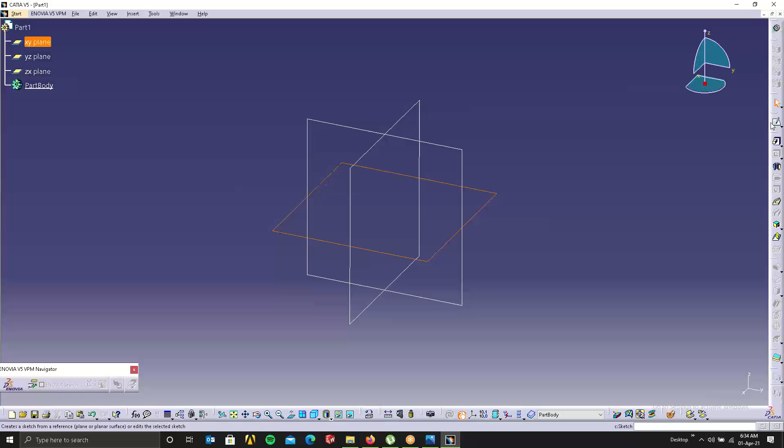There are two different types of assembly: one is top-down assembly and the other one is bottom-up assembly. So what happens in top-down assembly?

So we'll just create some holes.

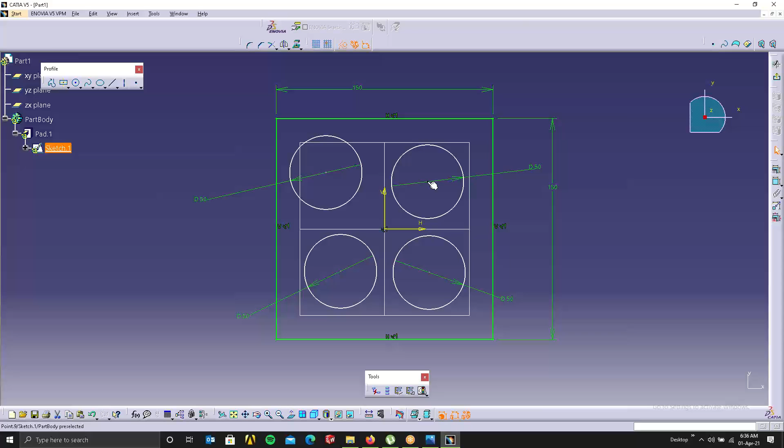So this is 50mm. Just update it. Okay, so I'll just save this file. Save as.

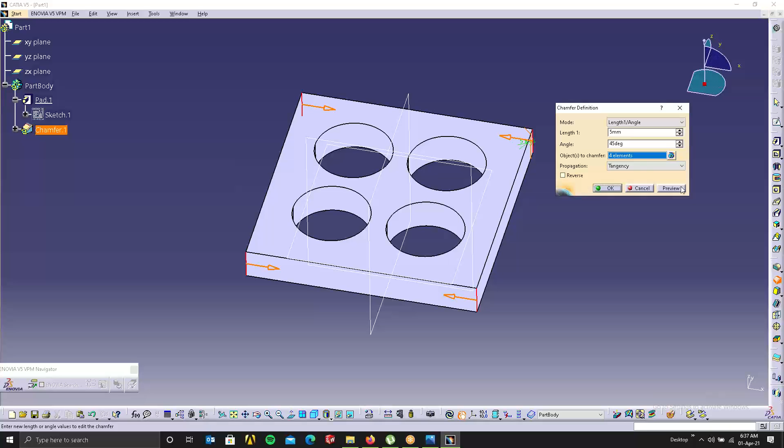Here, most of the time when you're doing this, just give chamfer at the ends, because sharp edges tend to hurt somebody. And don't give chamfer at these edges because machining is very difficult at these edges. Again, this is DFMA - here it's from a safety point of view.

Like when somebody is handling it, if the sharp edges are there, it's going to hurt them, so for that reason we give a chamfer. And one more reason is when it's very sharp, it tends to crack at these edges. For that reason we give chamfer at these locations.

But somebody will come and ask you, 'Oh, give chamfer here also, it'll look nice.' That time you should say no - I won't give that because there'll be a cost escalation. Here the material is removing like this, automatically they'll remove like that - it's much more easy for the machining person also.

But when you're going to give chamfer over here at a 45 degree angle, they have to make one more fixture to place it at that angle. Then after placing it, they have to lock it in place - some scratches will happen there. After that they have to remove this, then again set up the next side - that takes time. Then this side also takes setting time. It'll take some 3 hours for just doing the chamfer, and within that time the whole part could be completed.

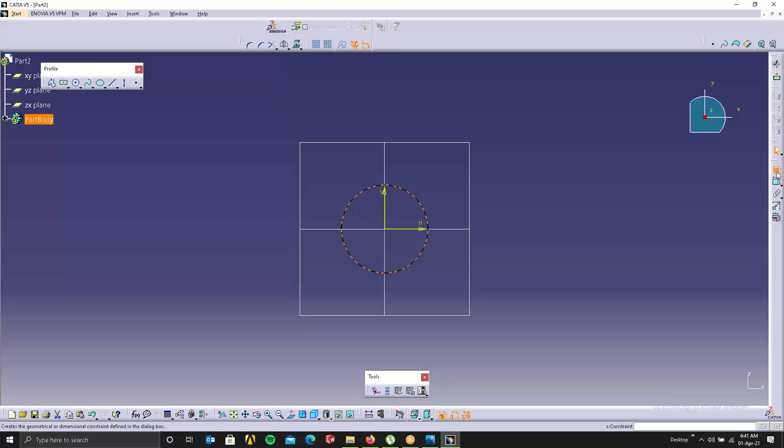It's so hot. So this is 50 dia. So if it's 50 dia, what value should you give here? There it was 50. So how much should we give here?

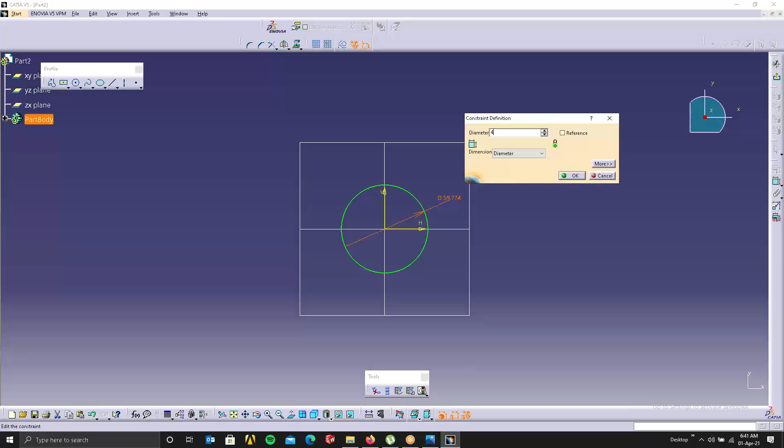For the assembly, you mean? Yeah, 55. 50 would actually fit, right? See, every time you have to give some tolerance. 49.5 or 49.9, like this you have to give. At least 1 clearance you should give. 49.8, something like this you should give.

How much is the acceptable one? Usually I give 0.1. Or else I'll give 1 mm, not 0.1, 1 mm you should give. But since there's a standard chart, from 0 to 30 it is 0.1. 100 to 200, it is 1 mm. 300 to 400 tolerance is 4 mm, 3 mm, like that. We have a clearance chart, standard clearance chart. So in that we have to do it. This is a very minute clearance.

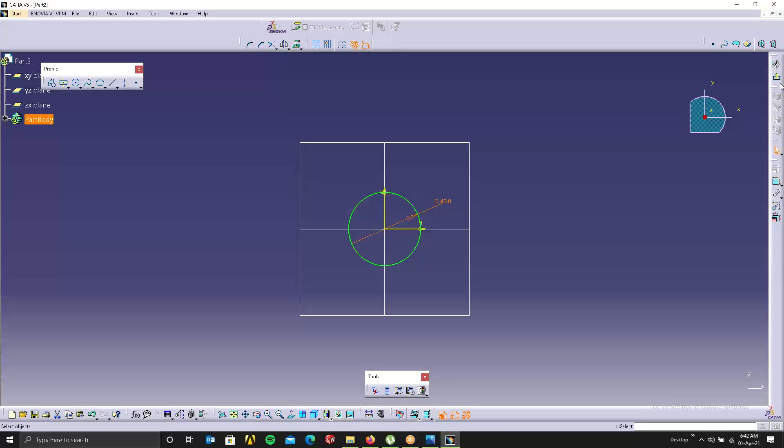So this will cost more also. So like that you have to do. But we have to make it fit inside. So we have to just pad it. Yes, okay.

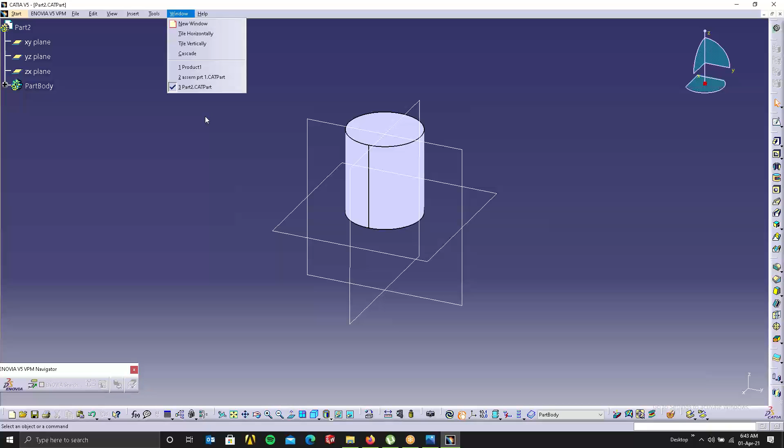Okay, so we will save. Save here only. Now straight away going to the assembly workbench. Where is that? Go to Windows. In Windows, all those things will be open. So go to Product. Now we are going to do our bottom-up assembly.

In this, what we are going to do is first see how to start, how to put something inside. No idea, right? So for that reason here we have component, we have component parts. In this, we can put existing component with positioning, or existing component. These are two options you have to use for bottom-up assembly.

Existing component with positioning is when you're bringing some part from outside, so that part will have positioning. Here you can orient it and everything. Here is just directly putting it. After selecting this, nothing happens, so you have to select this product. After selecting this, see this is in red. Select the product, you'll get the dialog box. In this dialog box, go down, select this, click OK, open.

One sec. So you'll get the part exactly in the center. Okay, just like the main body or something. If you're putting, you can just put it like this. I'll just remove this.

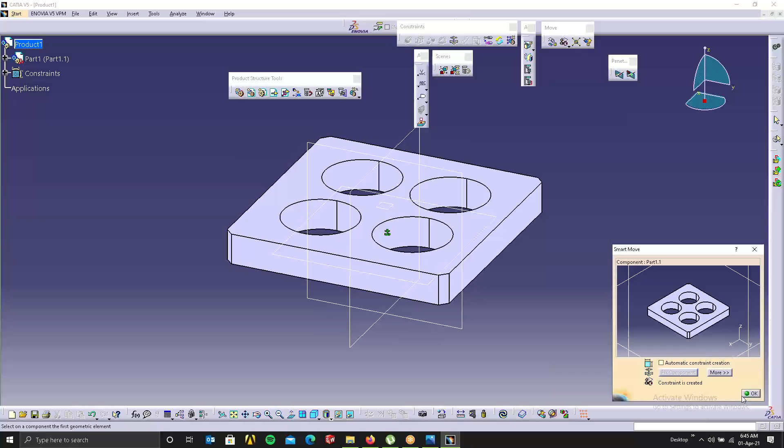Whatever is the main body, what you have to do is fix the component first. Fix means it should not move from the position. Once that is fixed, you can click OK. See, then directly you can apply the constraints. So now I'll delete this.

What you have to do is, see, you can use multiple products here. You can select this and select this, and put both. See, both these things you can put. So fix this one first, the component, and this. Once this is done, click OK. There you go, this also comes. Leave it, both is fixed, huh?

What was it? Take this, take this, select both, click OK. So both you can put it like this. Right click. Something is wrong.

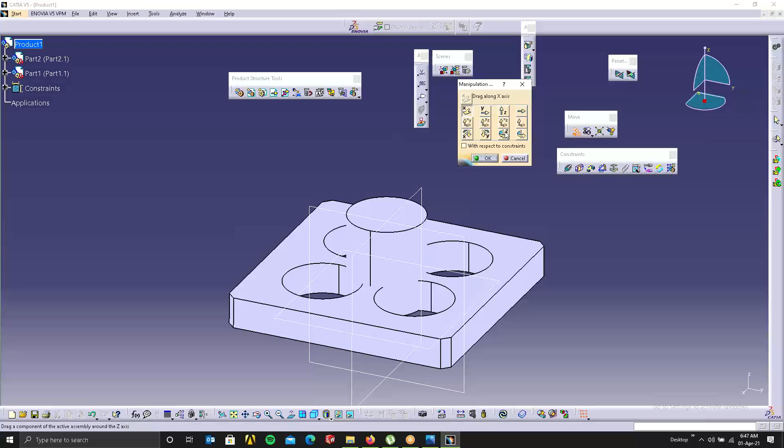So here basically we have many commands. First one is to move. Once putting it in the screen is done, next we have the move commands, then we have the constraints - these are the different constraints, and these are the move commands. The first one is manipulation. In manipulation we get this option to move the components in whichever direction you want.

First one is X direction. See the compass, this is x direction. In x direction, we can move it. Then we have y direction - again see the compass, this is y direction, so we can move it. See the compass, this is z direction, we can move it in z direction.

Here we have this arrow. This is our independent direction. So if you have any inclined line or something, you can just move this thing in that direction. Any edge you select and it will move in that direction.

Then is the planes, datum plane. See x, y - x and y is this. So in this area it'll move in this direction, x and y direction, or x y plane.

Then yz plane, y and z. Yz means this yz plane - this plane, it's going to move completely.

Then is what? X z, x and z - again in this plane, this plane is there, right? Wherever you place it, it'll be exactly on this plane. By seeing visually it will look somewhere else, but it's exactly on this plane.

Okay, then we can select any plane if you want - any other datum plane if you have created, with respect to that you can move.

Next is rotating, rotating with respect to x-axis. So this is x-axis, you can rotate it with respect to x-axis.

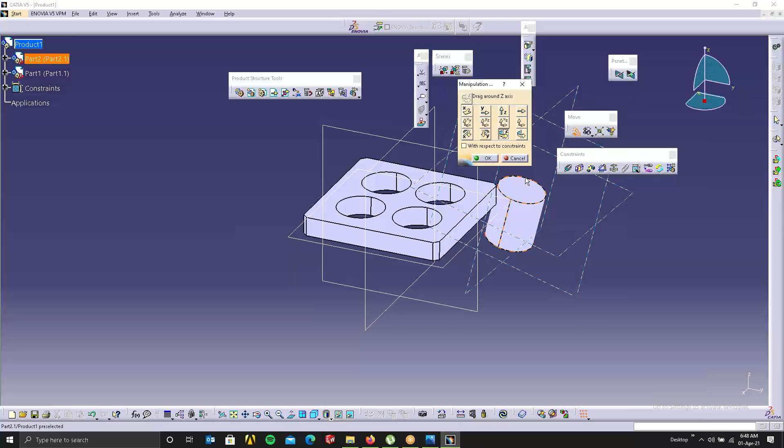And next is independent. Independent means with respect to whatever line or angle you want, we can rotate. So if you want this, I can rotate it with respect to this line. Okay, understood? So that's the advantage.

So first we'll just move this thing here, whichever direction you want, just move this thing outside. See, this is not fixed, so it's moving.

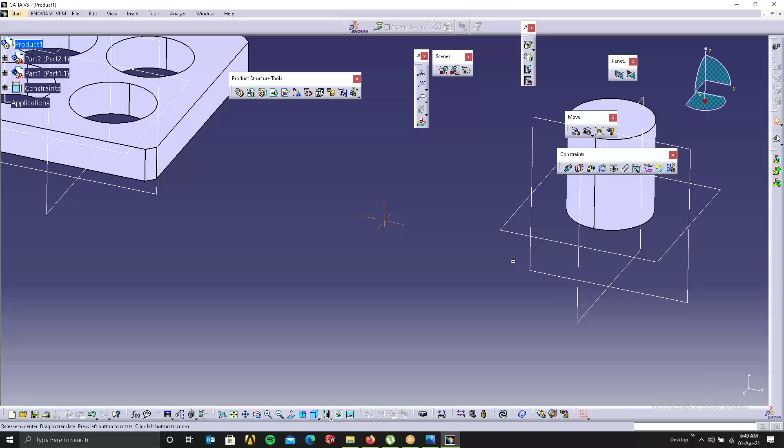Okay, good. So now once that is done, first we will do is - see here only we have the fixed constraint, so fix this thing in this position so that it doesn't move.

Next to that we have something called snap. So snap basically is like constraints, but it's not constraints. Like in constraints, we can move it, you can position it, we can do all those things, but the constraint is not applied.

You can see, we can just rotate it. See, we can rotate the product. We can just take this and take the center, put it here. See, it's like constraints - we can rotate it if you want, we can do anything with that. Using this, it's again positioning, moving the part from here to there like this. See, you can rotate it if you want, like this you can assemble it.

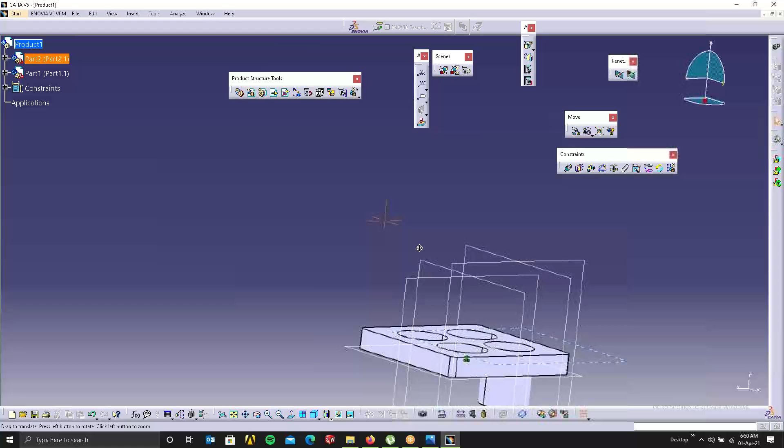Okay, but always remember, this is just a positioning movement - see, move command, it's just a move command, nothing else. Once this is done, I'll just hold control and drag this thing.

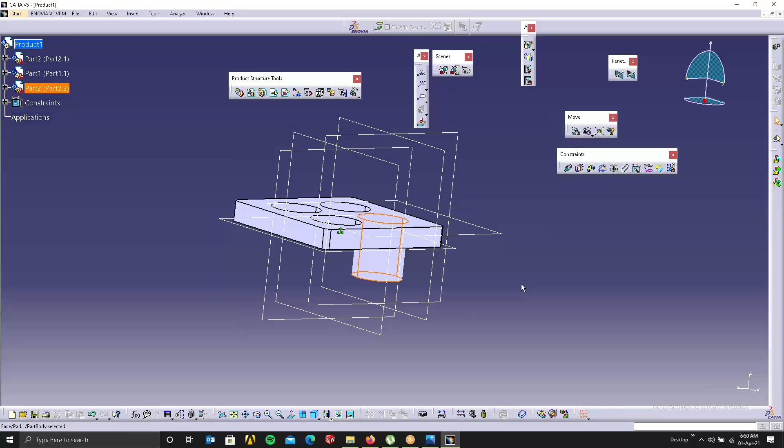Okay, so I'm coming, so leave it. So what I'll do is I'll just right click, copy, I'll put it here, I'll paste it here. See, part 2 is copied. I'll just move this in x direction.

Okay, I'll copy this also. Yeah, so you saw this, I applied snap over here for this part. So I think so, yeah, correct. So now click OK.

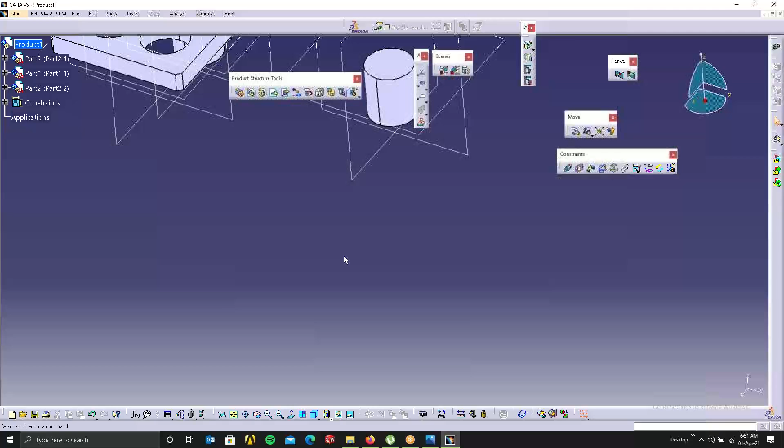Now we are going to apply these constraints for this. So here we can see coincident constraint. In assembly workbench, 90% of the assembly constraints you can use this constraint itself - this constraint only you can use.

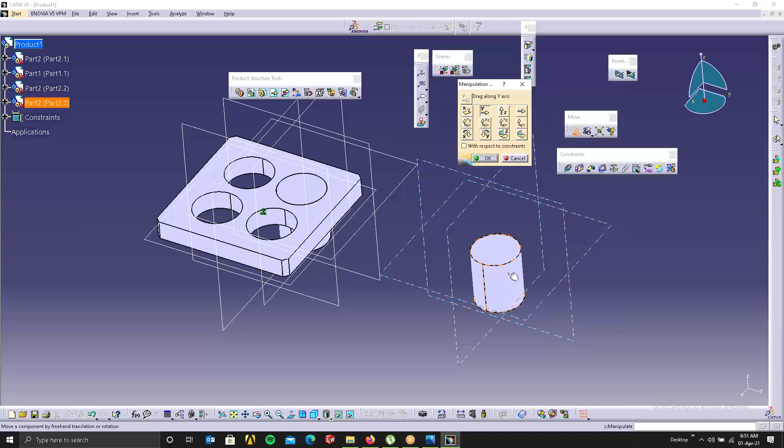Right click, copy and paste here, okay maybe one more time. So most of the 90% of things you can use this constraint only.

So you can just select this, close, select the center axis, select the center axis for the circle. Okay, done. Select this and select this. See again, wait, I'll just position this one. Which axis? Z axis.

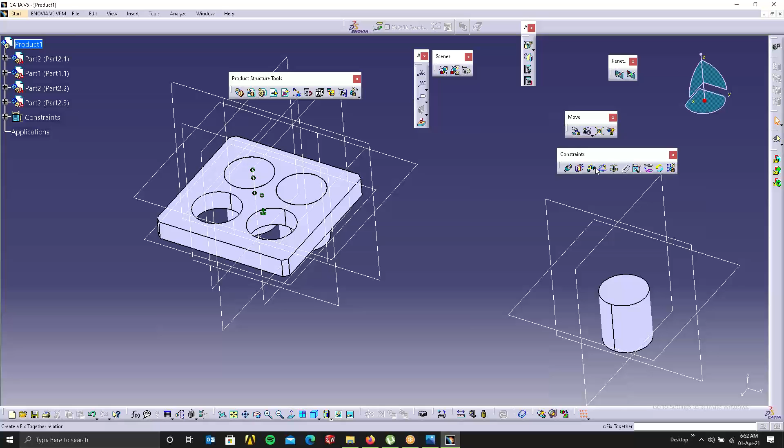See, I'll just move it here. Using constraints, I made the center axis coincident. Again, using coincident, I'm going to make these faces coincident. See, like this. Most of the things, you can use the same tool for most of the applications. So you can see these two are constrained.

Now what I'm going to do is use a move command. I'm going to pull this thing out, and pull this thing also out. These two things I pulled out - one I used snap, one I used constraint. So the one in which I used constraint, these circles are seen. In this snap, nothing is seen.

Now what I'll do is update. When I update it, the one which is constrained goes and sits in its place, and the one which used snap is just lying down there. That is why we should always remember to use the constraints, not just the snap tool. Snap tool you can use for your advantage, but always remember to use the constraints first.

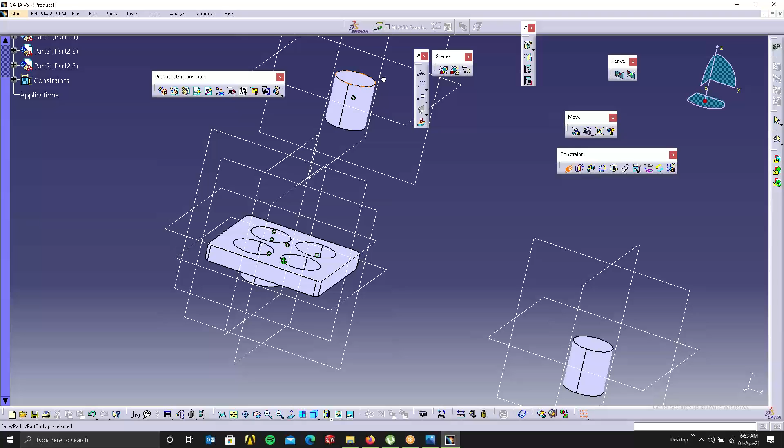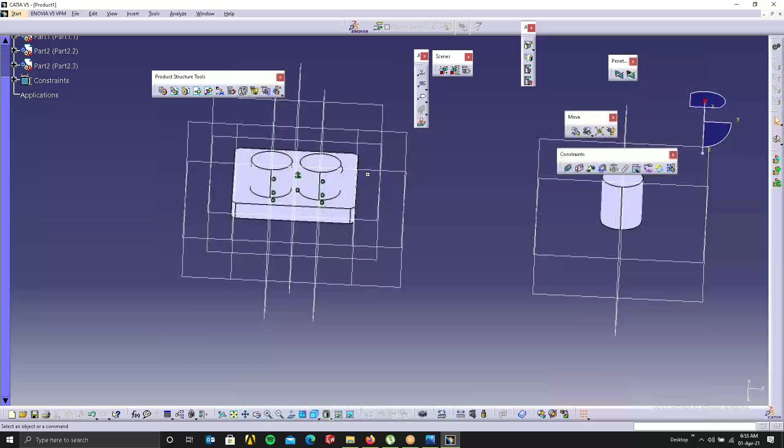Click OK like this. Now even if you drag both out, it'll come back to its position automatically. See, now if I click OK, update, both will sit back in its place. So the assembly is done. Understood? This is how you do the assembly.

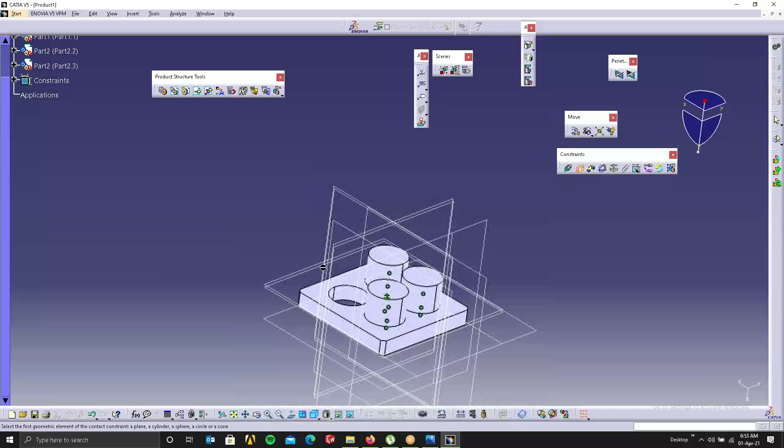Then here we have contact constraints. The contact constraint, again, it's the same thing. See what we did with coincident? Same thing only, that is what happens. Face to face constraint it is. See this face, see this face to this face. That is your contact constraint.

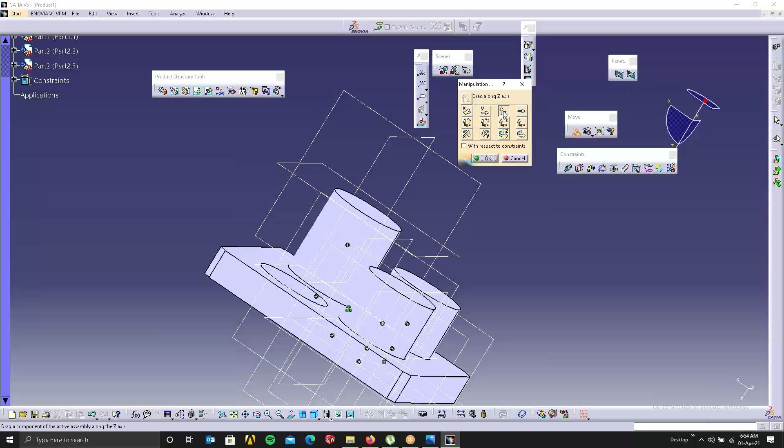But that is again double work because the face which it's going to select might be reversed. See now what's happened is it selected the wrong face. It's an unnecessary waste of time. So that's why I prefer this constraint most of the time. By Z axis, like this. Select this face, select this. So it's going reversed now. It's unnecessary waste of time.

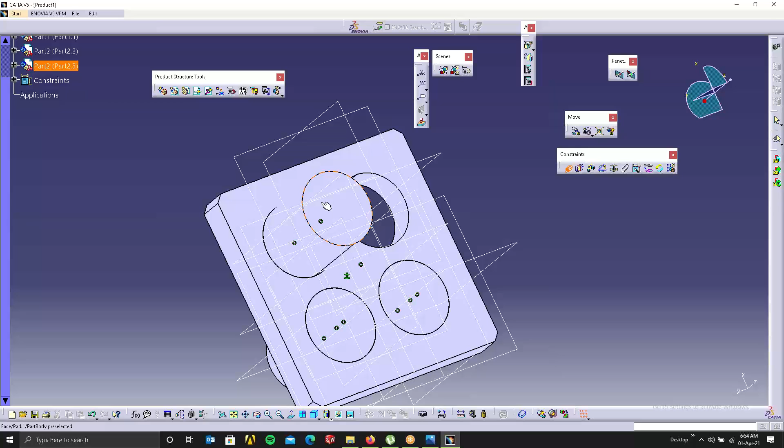Better than that is using this coincident only - automatically it's affected. Then there's this distance, offset distance. For that I'll delete this constraint. I'll delete this on the center. That's okay. Now I'll just move this thing a little up.

Click OK. Now sometimes we'll have to position the part at a certain distance. Then we have this offset. So we can select this face and this face and specify how much distance you want - maybe 20 or 30 mm. You just give the distance here. This is negative, directions will be negative. Click OK. So that position, you can give 20 mm distance or any distance using this offset constraint.

Then angular - if you want to give any angle, similar to this, we can select any part, any face, and give the angle between those two. It was fully defined, so here we can specify the angle. Two parts you select, two planes, this face and this face. Here it's a constraint we can use, but two faces you select in which you can apply the angle between them, and here you specify the angle. And you'll get it.

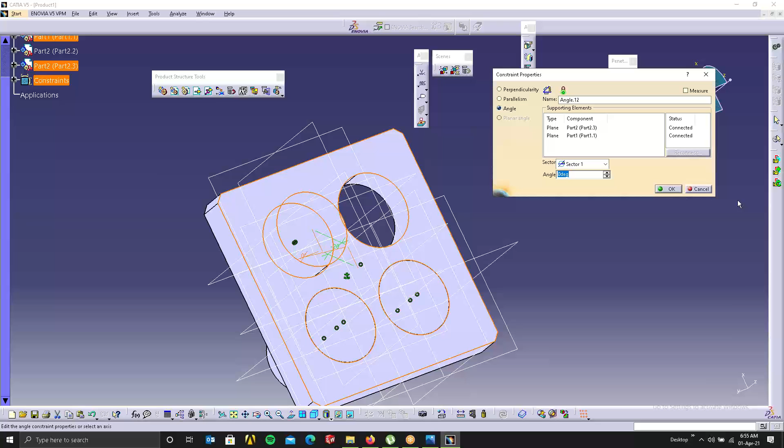Then this is a fixed constraint which we used. And here we have the pattern - reuse pattern. So now basically you saw we used normal circles, right? So that's why we're getting this.

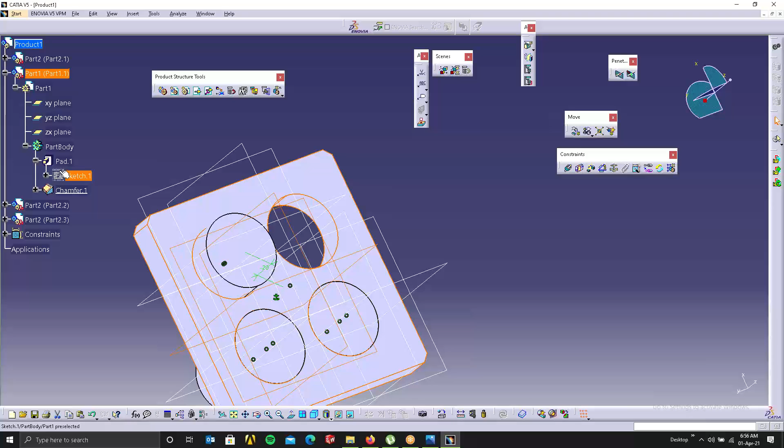Now one more thing I'll show you, an important thing. See, these are the parts that we did, right? Part one is the base. So if I click on plus, if I go to specification tree, I can see the part body - I can see the pad, I can see the chamfer. So what I can do is just double click on this. If I double click, I'm going to the part design body workbench. See, part design - I just double clicked.

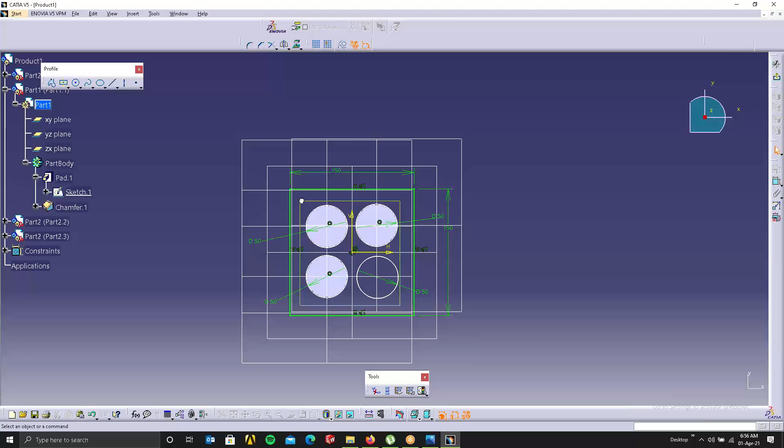So now what I'll do is I'll go here, double click on the sketch. I can do the editing part also. Understood? So I'll delete this. This is called bottom up approach. So all the sketches you can do it by yourself in this position. Now once that is done...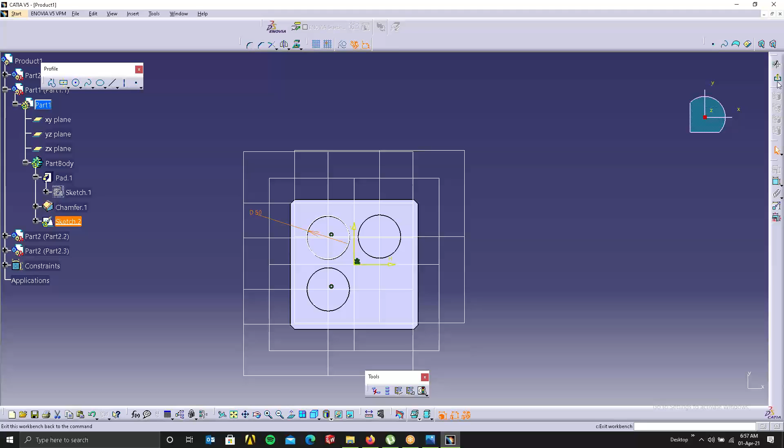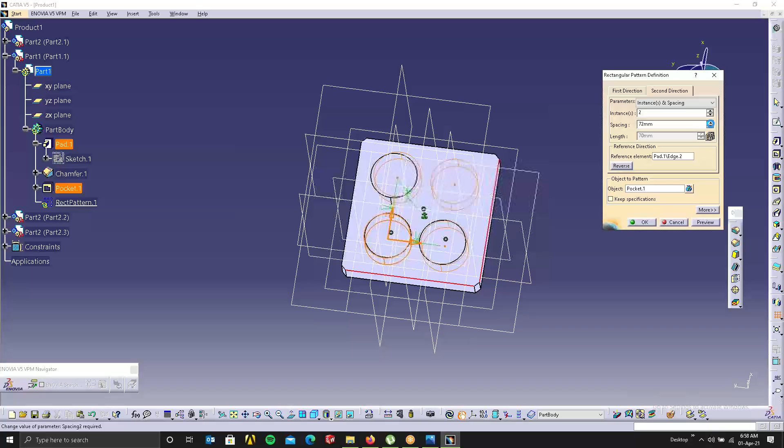So this thing, what distance here you put? Okay, now second direction also you take this direction. Add one more. Okay, click OK. So this is done.

Now to exit this pad thing, go double click on product. If you double click here, you'll get this. So you can see these constraints all here and there.

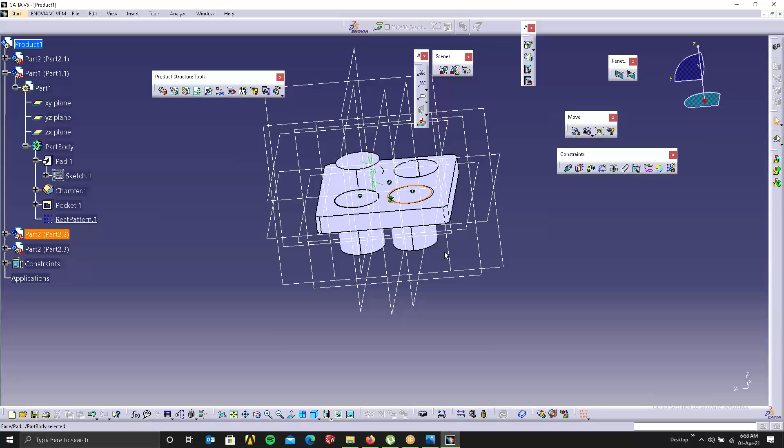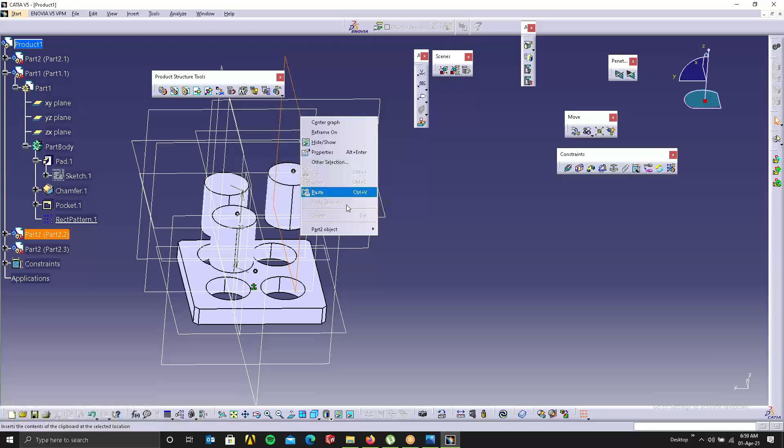So what I'll do is I have to constrain this again. So just move this up, up, up. And one more thing before putting this thing in assembly, just before saving the file, just hide these things. Hide the datum planes.

Because it's so confusing here, just hide it before saving it. So we don't need those things. So here you can see 20 mm. Just delete everything because these will be over constrained. Okay, that is surface, that's okay.

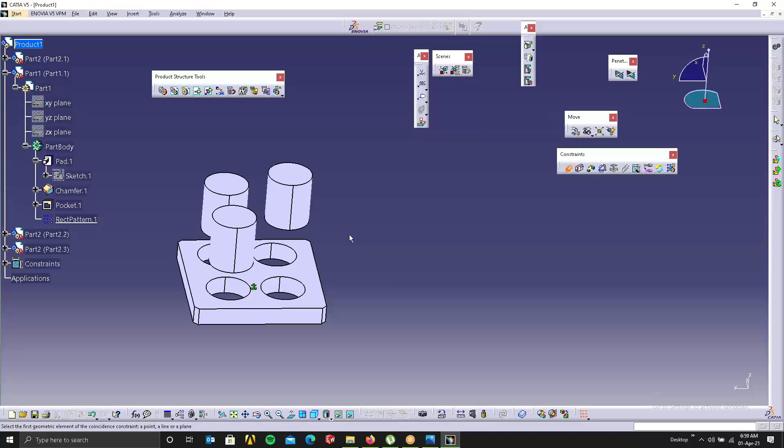So now we'll just take constraints. Sorry, center axis, center of this. Center axis, center of this. Center axis, center of this.

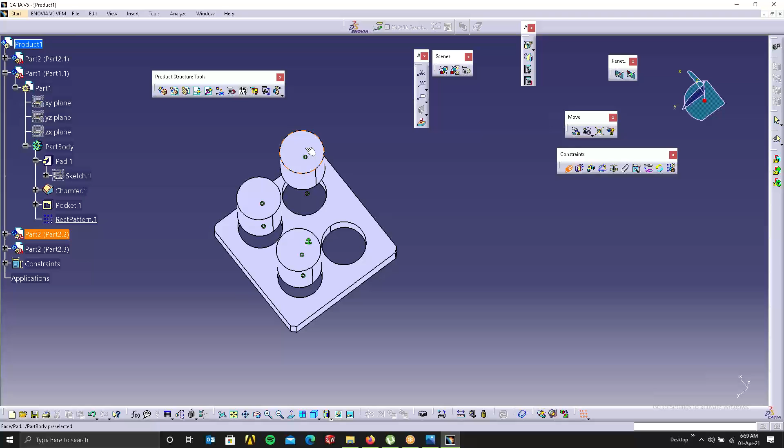Then select this to this. Okay, this to this. Okay, this to this. Okay.

So now I'll just... what we are going to do something. This thing I'll just hide. Control Z. This thing. So wait, we don't need to do so many things. So I'll basically delete these two things. So much time we used here, right?

So what I can do is straight away use this command. So pattern, which is our pattern. So you have to open this. So this will be closed like this. You have to open, you have to select this rectangular pattern. So all the pattern, everything is shown.

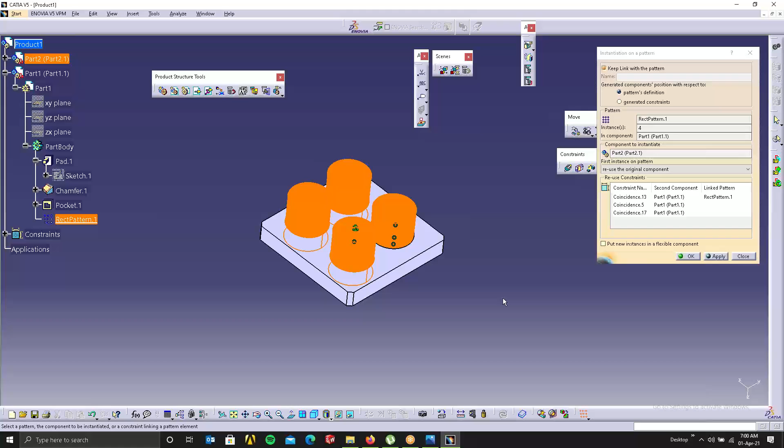So component to instantiate, our this component will instantiate. Just within how many seconds? 0.1 seconds, I could do this. See, all those things is done. So like this, I could save my time. All the constraints is also reapplied.

So that's why we always make sure to use constraints like patterns in your model. As I told you before, this fillets, all those things don't use in sketch. Make sure you use it there.

So this is how your assemblies — this is only so much is there in your assembly workbench. Then here we have this trim command, this whole all those things. This you can directly, as I told you, open this, go to your part design, and you can do it. No problem, understood?

What else is there in this? So now we'll do one assembly for one parts.

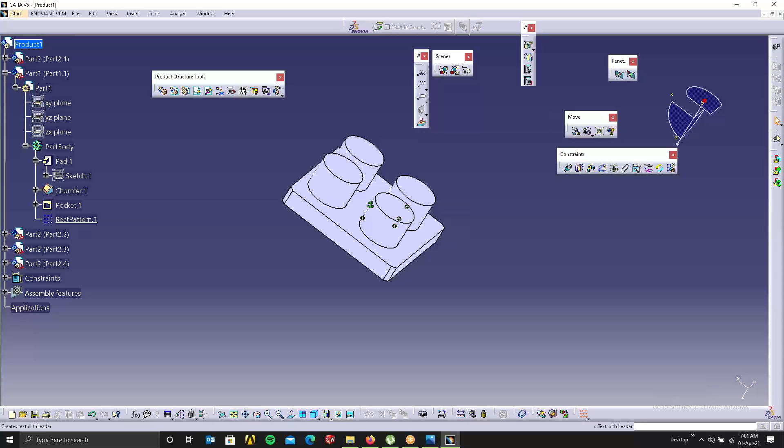So I'll just show you this. You take this as an assignment. Where is this assembly? Take screenshots and try to complete it.

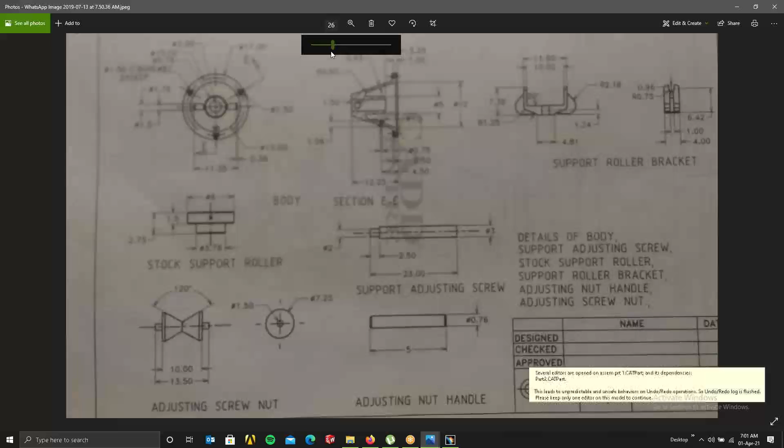Can you zoom in? It's okay, don't worry about this. I'll give you more photos.

Done. Yeah, done. Okay, done. Prabha? Uh-huh.

Next, this. I can't really see what's there. Don't worry, I'll just give you more focus. You just take this.

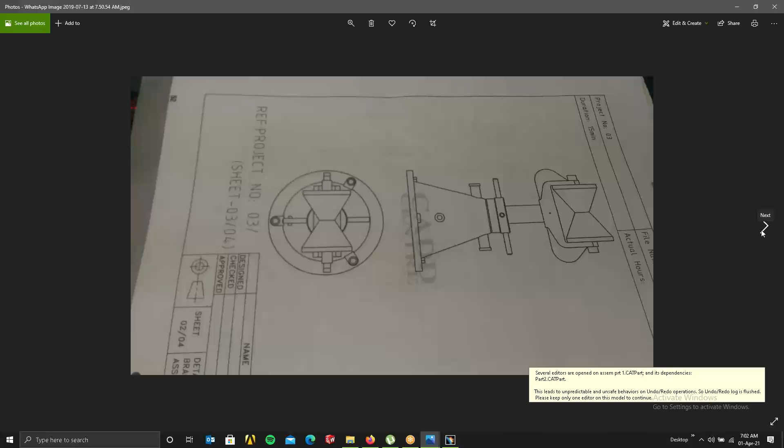Have patience, you have very less patience. You're always in a hurry. So this you take. Yep.

Srivadan, done? Yeah, done. Okay, this you take.

So this is called BOM, Bill of Material. So how many parts is there in your model? So all those things is documented here. The manufacturing team, they can see okay, how many numbers are there, four numbers are there, so accordingly they'll manufacture it, accordingly they'll assemble it. So all those things is very important. Bill of materials, one of the most important things in mechanical design engineering.

So not just this quantity, they'll give the material type. If you're procuring the material, they'll give you the make. Like if you're taking QDCs, there'll be different companies — you'll have Hamlet, you'll have Stäubli, you'll have this Parker, multiple companies. So those companies' make will be shown here, what material they are using will be shown. So all those things will be there, and the part number. If you're procuring it, the part number of the product will also be shown here.

Understood? So that is called bill of material. And item number you can see, not that item number, this is this item number here. See, 1, 2, 3, 4, 5, 6, 7. So it's like showing which part is where.

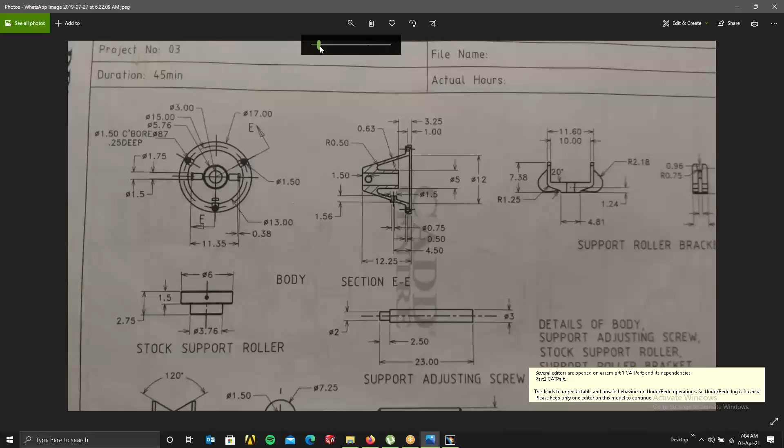Done. Done. Yeah, done. This also you take, this one. I'm done. Yep, take this. Done. Yeah, very much so.

So seeing all these things, study it properly, then you do it. Because I'll show you why.

See here in this part, they have given the outer diameter 6, and all the thickness, everything they have given. This is stock support roller, right? They haven't given it. See, if you take the stock support roller, what is this? If you take the stock support roller, number 4.

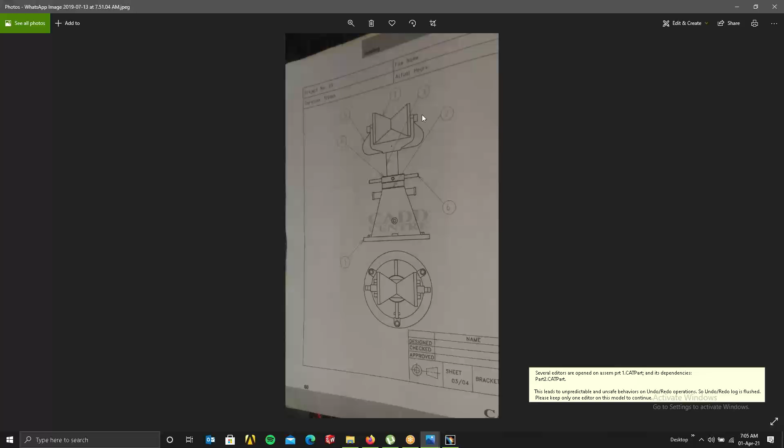See number 4, this here is stock support roller, but this rod is passing through it, right? This rod is going inside this. So if you see this number 3, this rod is number 3. So number 3 is support adjusting screw. So the support adjusting screw is going through the stock support roller.

But in this, if you see stock support roller, there is no inside diameter they have given, right? So support adjusting screw is here. So this thing is going inside this. So what you have to do is diameter 3 you have to make inside. Okay, then only this thing will go inside.

So this is how people, like the manufacturing team, if some dimensions are missed out, they do this. They check it like this, so this thing will go inside. Once they have the clarity that this is going inside this, they'll automatically take this diameter. Okay, like this they have to do. Understood? So study this and accordingly do that.

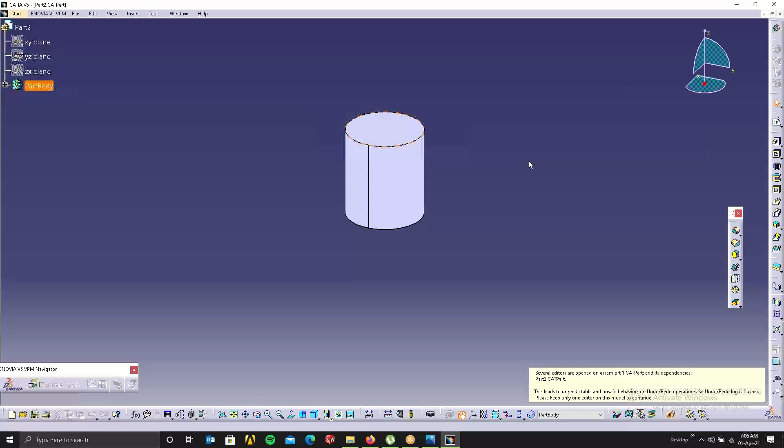Understood? Now we'll do this assembly part. So we'll just close this, not required. We'll close this also, not required. So we'll just open assembly.

Mechanical design, assembly design. So we'll just click existing parts, select this. We'll go to assembly, all the parts we'll select, we'll put it here. Okay, this is done, already done.

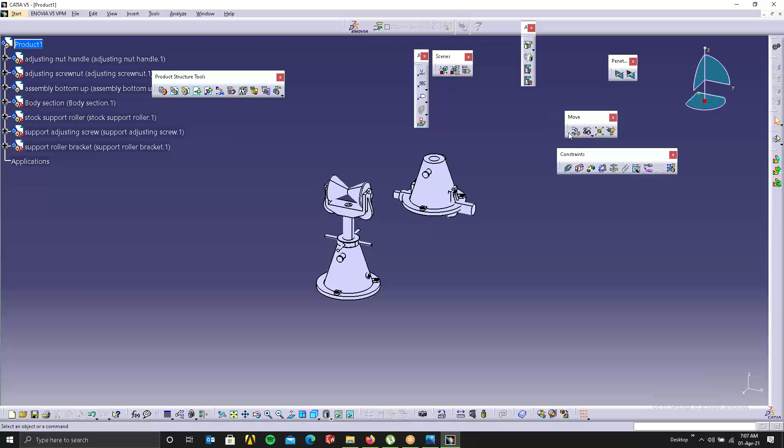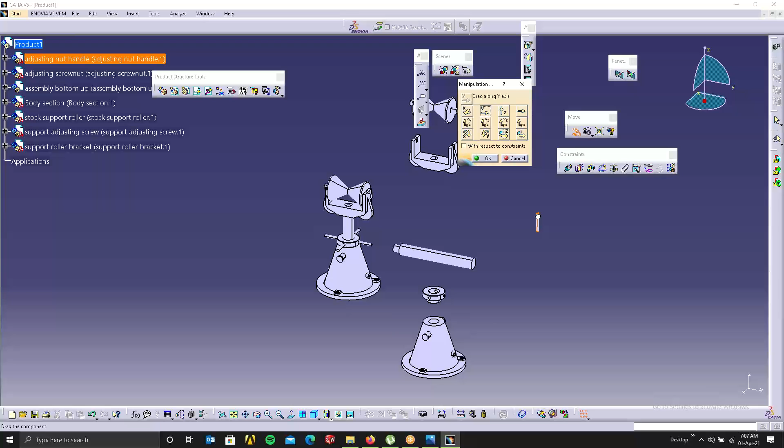So we'll just take our move command. We'll just put it here and there. So this thing is here, this thing will go up, this thing somewhere here, this thing will come below that. So now this y-axis, this will put here. Okay, so these are the parts. Now I'll just click OK.

So now our coincident, with coincident only I can do everything. I'll select this center axis of this, that is done. Then this part, same thing I'll do. This thing, center axis of this to center axis of that is also done. Then center axis of this to center axis of this circle inside. Wherever circle is there, you'll get an axis. So it's much more convenient for us to constrain it. So center axis is also exactly in the center.

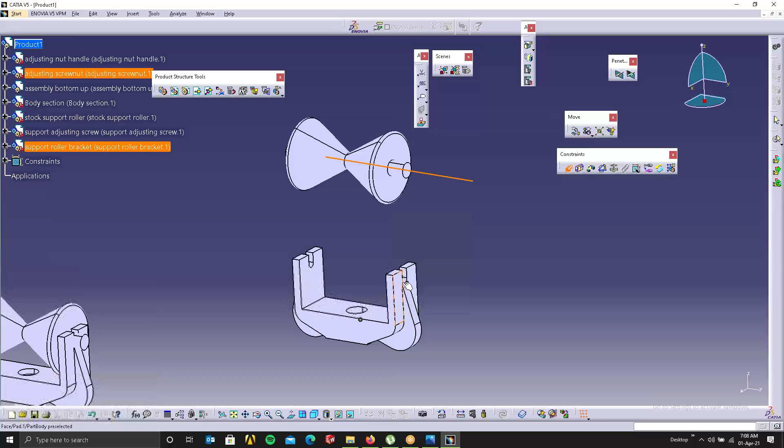Okay, that's done. Now we can take coincident again. See, this circle is there, center axis you take. Here also one circle is there. Wherever circle is there, you can give the center axis. Okay, that is done. Now select the surface.

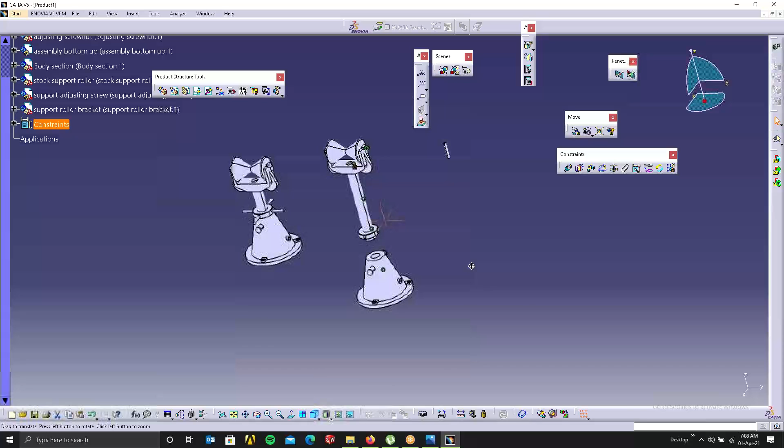Again, I can use this coincident constraint. I can select the surface, I can select this surface. Okay, done. Click OK. Now I can select this surface, I can select this surface to that of this surface. So that's constraint. Click OK.

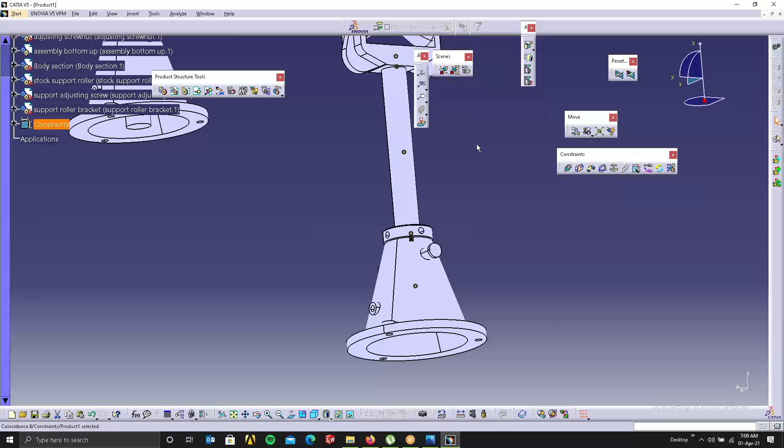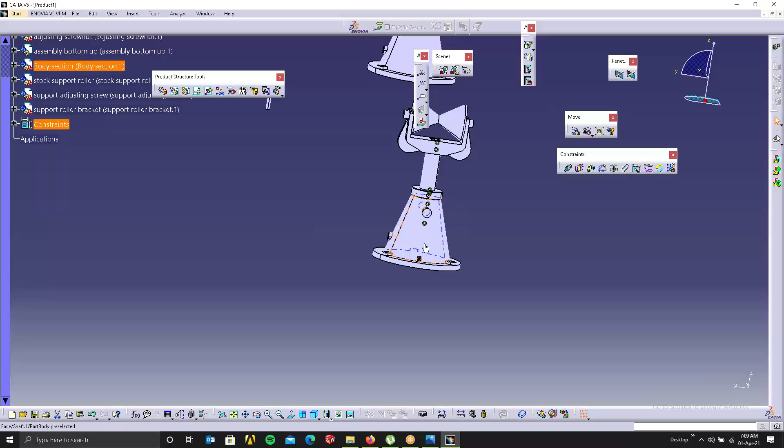Now I'll just push this thing inside some distance. So I'll just select, wait, I'll just better this. I'll give coincident to this. Where is this surface to this surface, I'll give. I click OK. So you can see this came inside. So what I did is I gave coincident to this surface again, that rod.

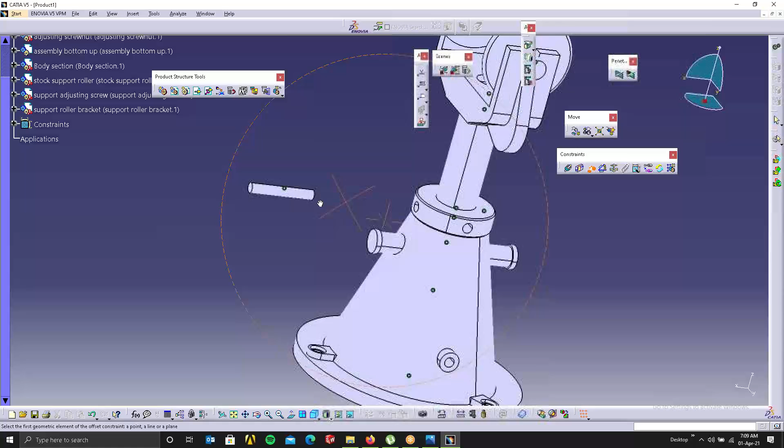So that is done. Now we have this small thing. So this also I can give coincident constraint. This one I can select center of this, I'll select. So it's come till here. Now what coincident can I apply because this is circular in shape? So what I can do is I can give distance from this flat surface to the center axis you give. Here I'll give 2 mm. Yeah, okay, so this is done.

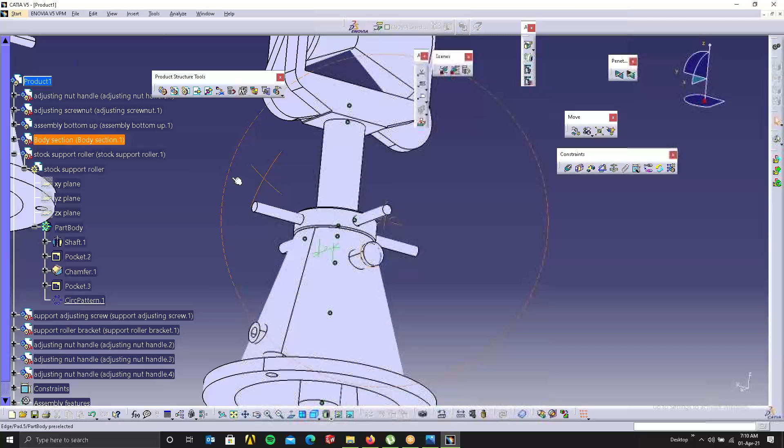Now similar to what we discussed earlier, this part will just go open, open, open part. Doesn't see circular pattern is there? So no need to break your head, just within few seconds you can complete it. You can just select the circular pattern, so all the circular patterns are selected. Then which component you want to pattern, that you click. That's it, rest the computer will do. So click OK. So work is done, see your assembly is done. Within how much time? Within few seconds your assembly is done.

Understood? Yeah. Srivardan, any doubts in this?

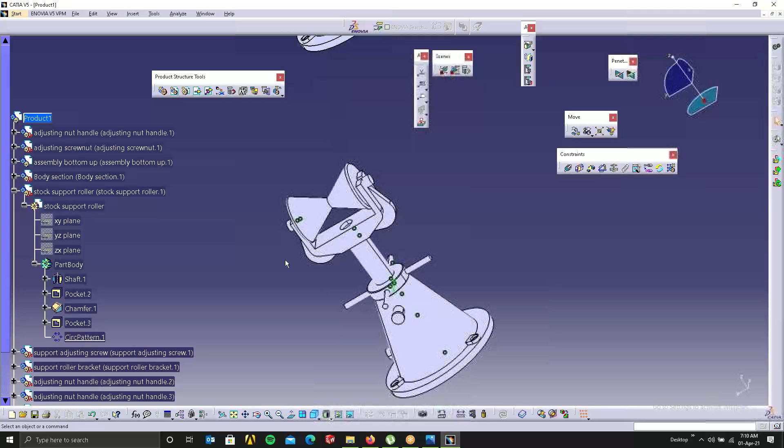Should we also constrain the roller top of thing on the top? I mean, it's already constrained. See, it's already constrained to the axis, but not to the side. I think inside, what is it? It should still be, it should.

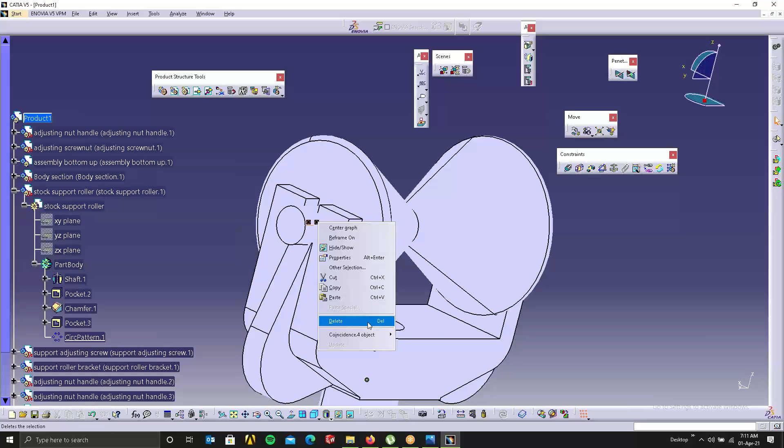We can. Yeah, we only constrain it to the axis, so it can still move on the axis, right? Wait, let's check, like this, let's see. Move in the axis, yeah, that is there. If you do this, just check it like this.

Use the update command. Update. Something wrong with this. Again, I think there's some system error.

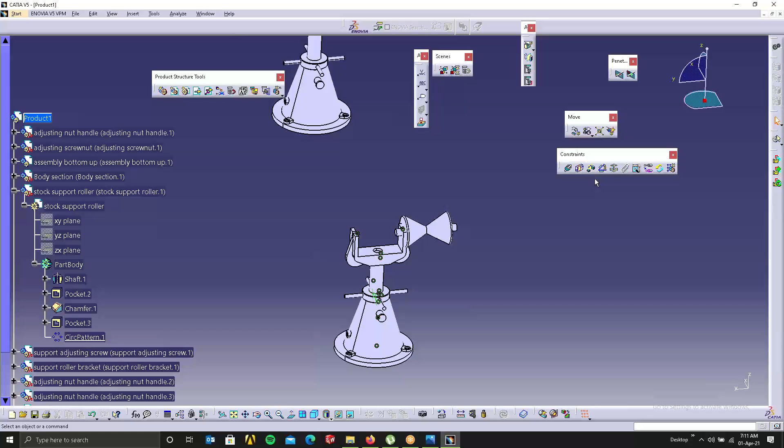That's okay, you can just give the dimension to fix it. So you can give this surface to this surface. You can give 2 mm, or right, point 2 something. Click OK. But that's also too much for it.

Point 0.1, because the dimension for this is very small. Point 0.1 also, I think it's very big. I think it should be a contact constraint. It's not contact, it should have some free movement.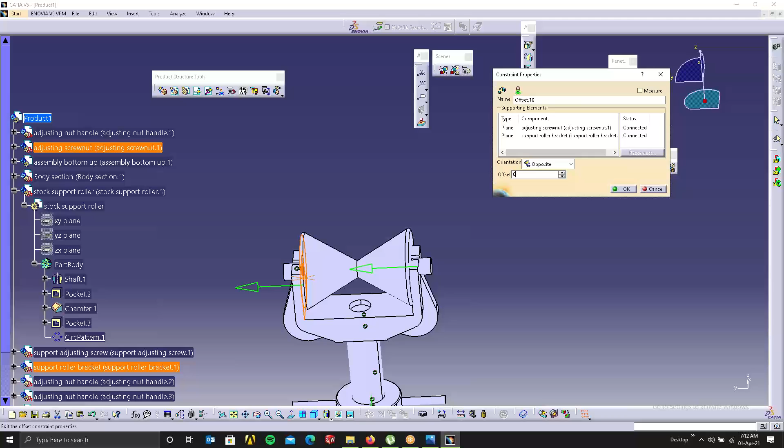Zero. Yeah, yeah, we can give contact constraint. Again, coincident we can give it. Okay, now it's fixed. You can give dimension, or we can just give coincident surface to surface.

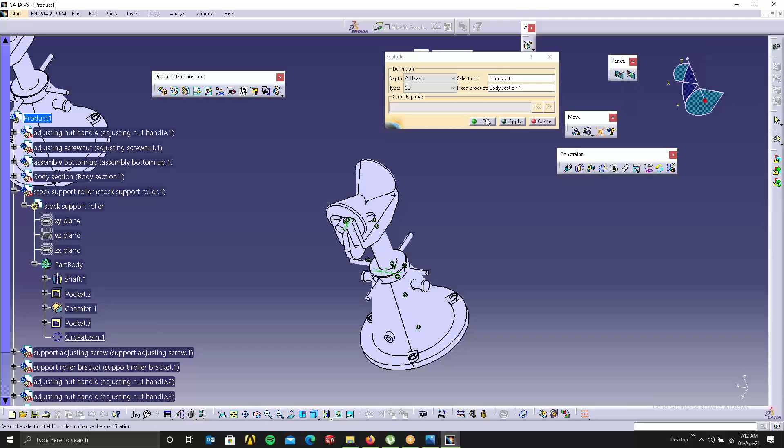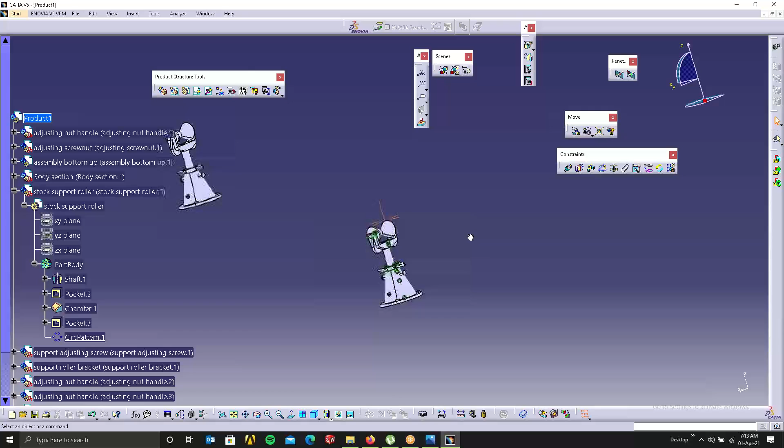Okay, this is your assembly. Everything, whatever parts you used, everything you can see from this. I can just update this automatically, and it'll come back to its original positions. That is here, it is there, the explode command.

Then what else do you have? Yeah, so much. Anything else? Yeah, so we'll save this. It's already saved. For drafting, it will come handy. Okay, any doubts in this? Nope. Okay, so only so much is done in assembly.

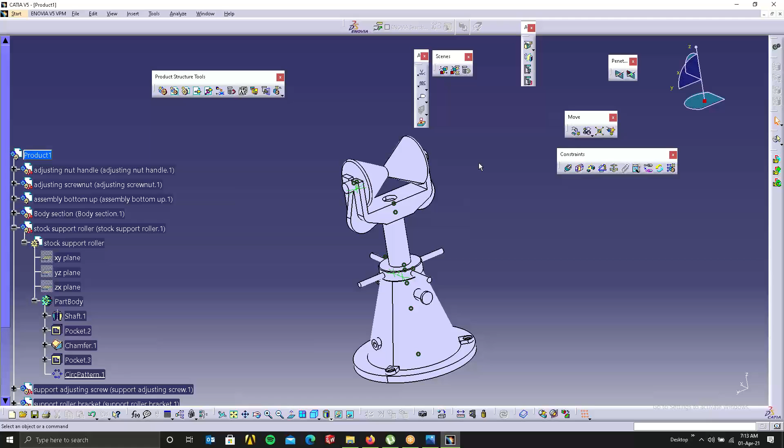Nothing to break your head over, so concentrate on part modeling. Do one more example for that. Here I'll give you this hook also, try to do this. It's not that complicated, it may seem complicated.

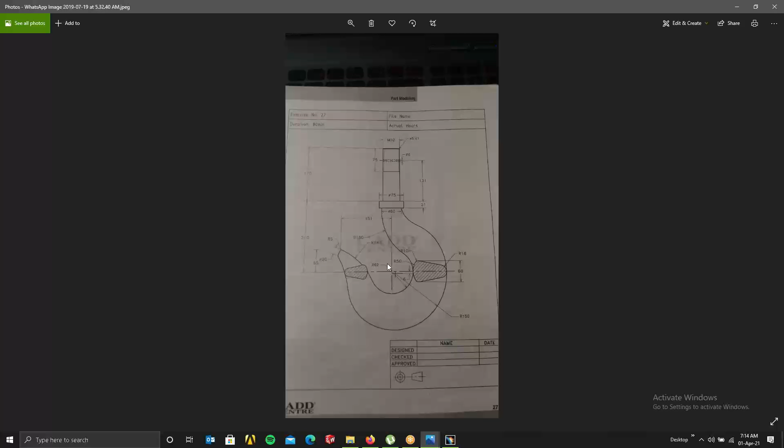It's multi-section solid again: one circle here, this one profile you draw here, and this one circle you draw here. And instead of spine, you have to use guide curves. Well, you can use spine also, no big deal. You can use guide curve or you can use spine, both it's okay, no big deal.

So you can just draw the circle, draw this profile, and draw this circle. You need to draw this, and we'll get the hook. Okay, take a screenshot of this. Look for multi-section solid. And don't do it in a hurry, take your time.

I don't understand the hatched portion in the drawing. This thing actually, they're showing the cut section. Wherever hatch is there, that is a cut section. They're showing what is inside, so that we can do it.

So this is how the hook is going to look in this shape, which they can't show you otherwise, right? So they have put it here. So if you draw this profile, when multi-section solid is there, it will take the shape of the hook. Oh, so at that point it's not a circular profile. No, it's not circular at all. It is in this shape.

So you have to select this datum plane, draw this profile. You have to select this datum plane, draw a circle. You have to create a datum plane here. After creating this plane at this location, normal to curve, you have to create a datum plane here at this certain angle. It will automatically come.

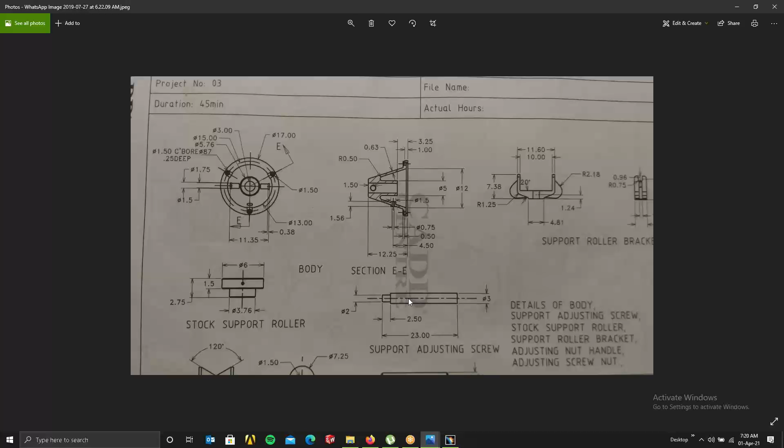That's all right, and this thing is again just revolve. Just create one side, give revolve, or else you can just draw a circle and pad - anyway, you can do it. This is again pad only, nothing else is there.

This again, see, you can just create a 120-degree line, give angle, just draw this. Here, they haven't given the distance, but wherever distance is not given, just assume it. You don't have to break your head over it. It's just an example.

Shall we revolve this too? Yeah, you just have to revolve it. Just create this and revolve it. You can just create half of it and revolve and mirror, or else you can create this one entire half and just revolve it - anything you can do.

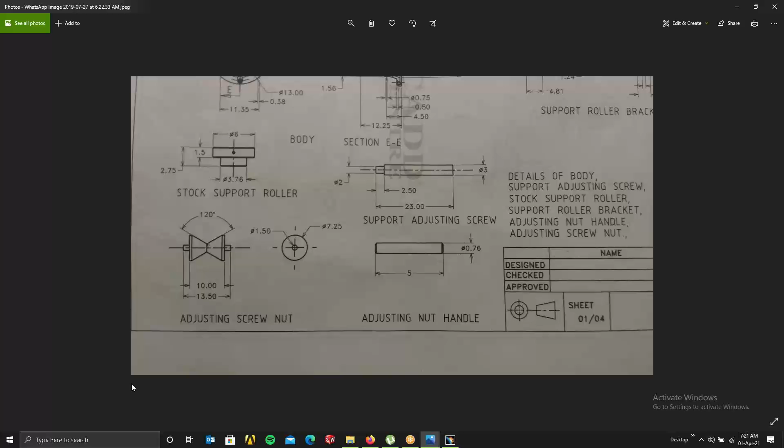Okay, just take your time. If you just observe it and see it, take your time and look at it. It's nothing, it's easy. You'll be able to do it within 45, 50 minutes max. And if you want some leisure, you can take some more time, around 2 hours.

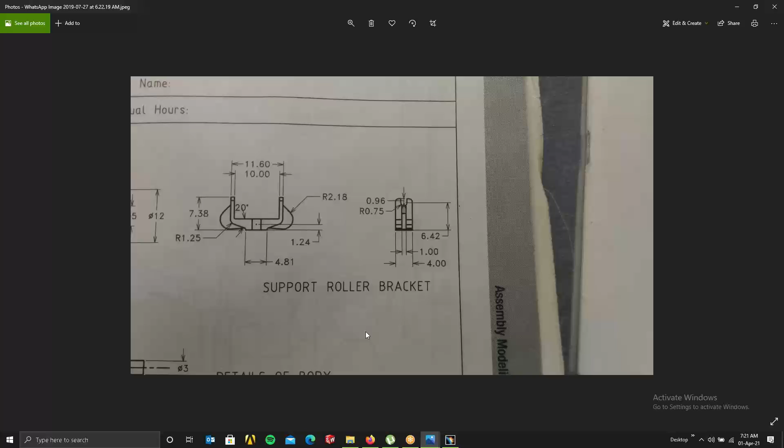So you can do it, don't take so much time. The maximum actual time required for you to do the entire thing is 30 minutes, actual time you can do it around. So this is done, right?

So try to complete this also. As I told you, this is the normal part. From here you have to start your intersection solve. Understood? Okay, so try it out.